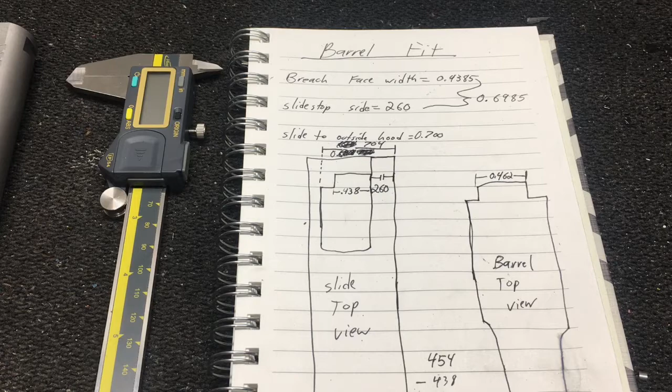Jer-Z Customs here. Just wanted to give you guys a little quick class on fitting a 1911 barrel to the slide. There's a lot of steps to this, but basically, you want to look at these two drawings right here as the top of your slide and the top of your barrel.

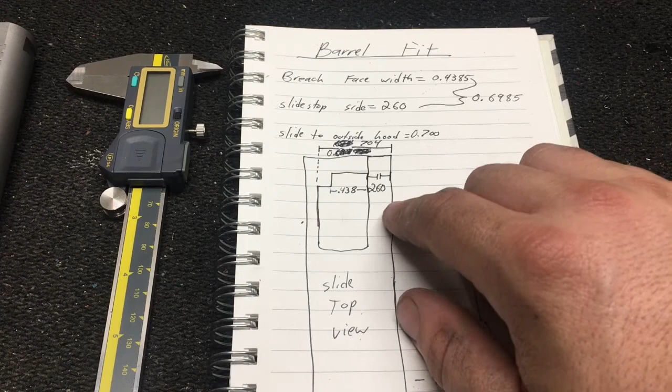Okay, the first thing you're going to do is you're going to measure the wall right here. So if you're looking at the top of your slide with the muzzle facing this way, you're going to measure this wall here on the inside of your chamber to the outside of the slide, the flat edge. Okay, you're going to want to make sure that your caliper is flush on that flat edge. All right. Now remember that these measurements I have written down here are for my weapon, my slide dimensions, my barrel dimensions, everything like that.

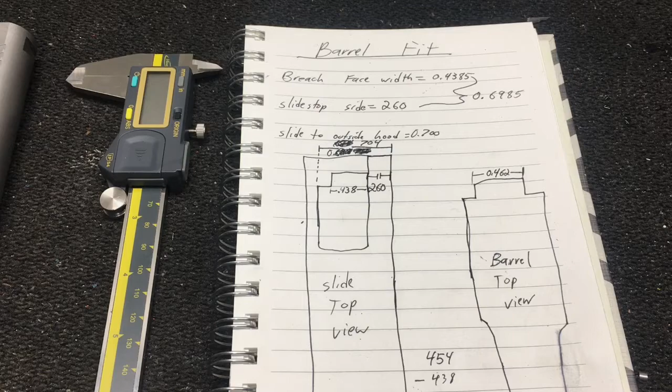Personally, I got a barrel from Bar-Sto. All right, this is a very good barrel company. They make a lot of match barrels. They do a lot of competition stuff with Glock, Beretta, but this company is very, very good and well reputed. All right, so moving on from that, what you want to do is you want to get these measurements.

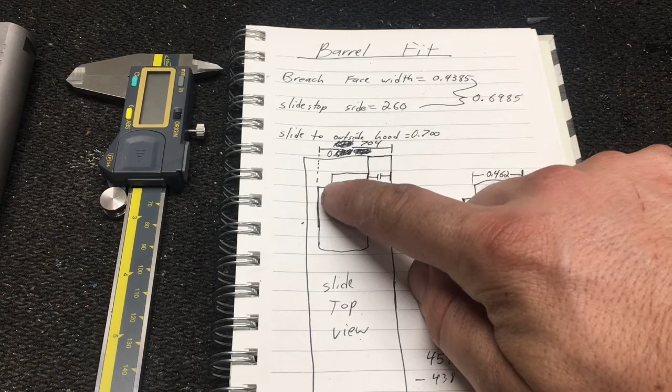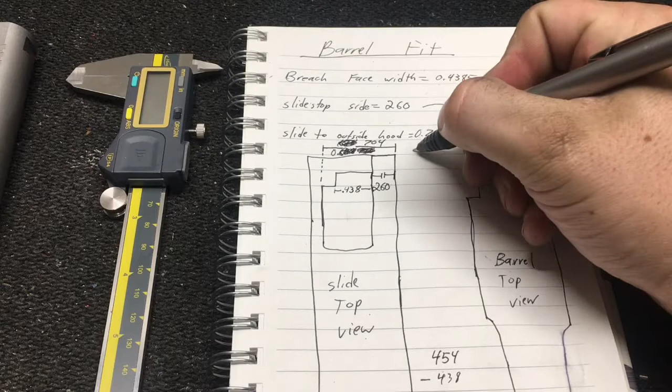Okay, you want to first measure from the inside of your wall here to the outside of your wall, and then you want to measure the width of your breech face from here to here, and then once you get that measurement, you're going to add it together, and you're going to come up with a number. You're going to put that number off to the side. Here, this time, mine was 698. You'll see a cross out right there. I'll go ahead and write it in. So 698.

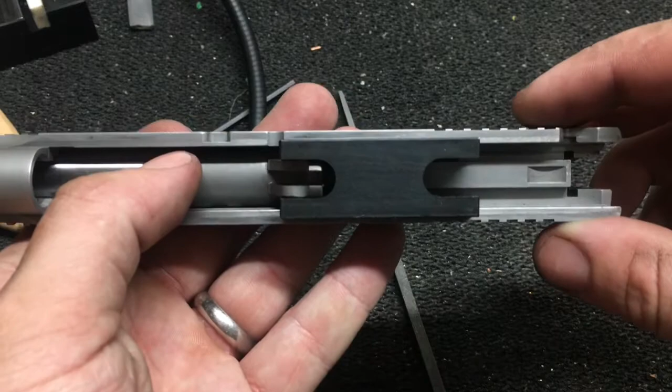Now, then what you're going to do is you're going to put your barrel inside the block. So what I meant by barrel in the block is you're going to slide your barrel through. Now, remember that I'm using a bull barrel here. If you are using a barrel with a bushing, you're going to want to put either your fitted bushing or a loose bushing around your barrel to slide it in, okay? Because that's going to make you have the correct fit.

Then you want to get one of these barrel alignment blocks right here. Brownells sells them. It's a great tool. It keeps your barrel lugs centered and makes sure that your barrel, your breech face, your firing pin hole, and your actual center of your bore is lined up correctly. Okay, so once you have that, you're going to go ahead and turn your barrel over, and you're going to take the measurement from the outside of your barrel, this surface right here, to this flush area right here.

And you want to be careful when you're doing this, because when you're measuring with the caliper, it's very easy for the angle to get skewed. So you want to make sure that when you put the teeth of the caliper on the outside of this, hold it up to a light and make sure that there's no light coming through between the tooth of the caliper and the side of the slide.

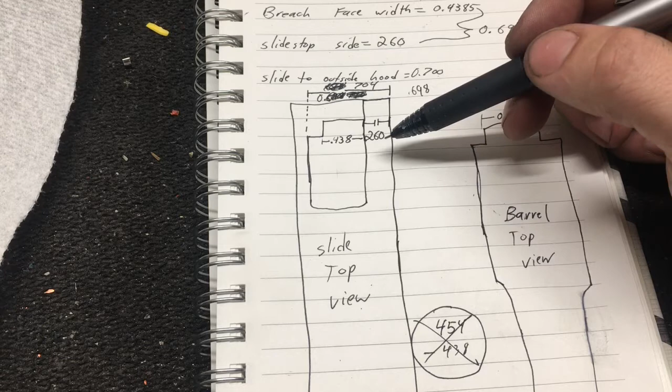Alright guys, so once you have your measurement from the outside of your barrel to the outside of your slide right here, you're going to subtract that from your measurement from the addition over here. Okay, so you guys remember what we did? We did 438 plus 260. So you should have come up with about 698, or at least those are my numbers. So you're going to take that number and subtract it, and that'll tell you how much you need to take off of this side of the barrel hood. Okay, that's this side right here. You're going to take that amount off here.

Then remember, you measured what your true measurement of the actual breech face was, which was 438. So after you take that amount off right there, you're going to take the remainder from 438, and you're going to take that off of the other side of your barrel, okay, right here. So you take off your first subtraction from this side of the barrel, and whatever's left over from the total amount minus this 438 is what you're going to take off of this side.

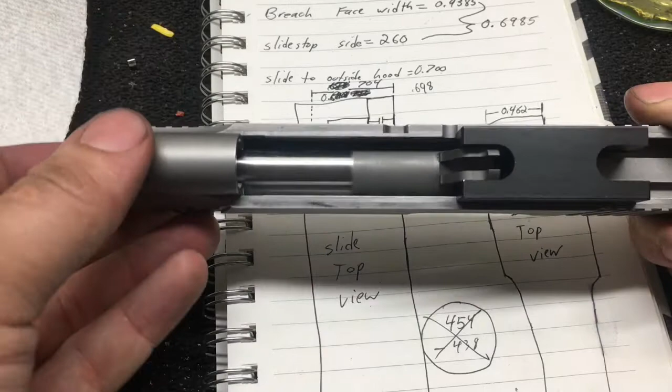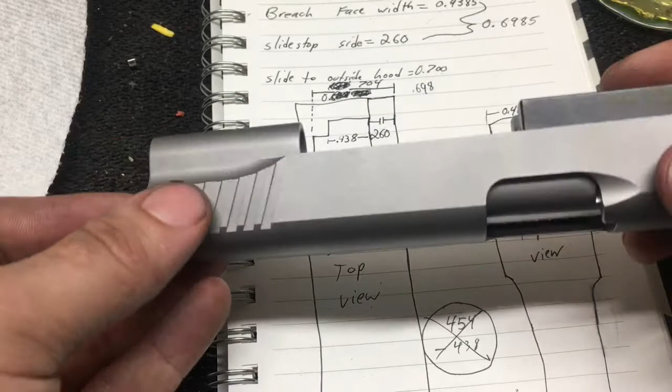Okay, so for the last part of this video, this is part one. There's going to be a part two of the barrel fit. You've got your alignment block done, your filing is all complete, and your barrel is seated in the breech face. Now, you'll notice that there is a pretty good sized gap right here between the back of the chamber and the slide itself, okay? And also you'll notice that the barrel itself is not seating in the lugs, okay?

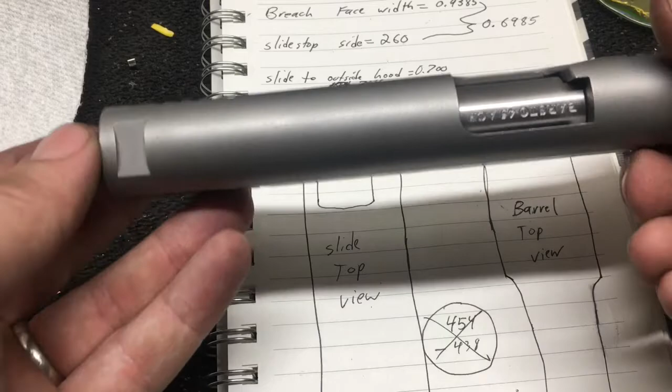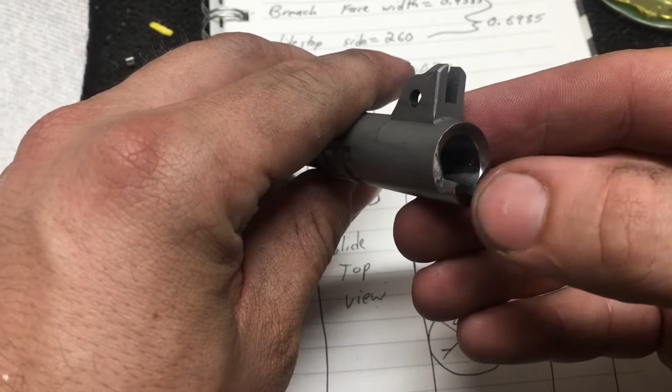So this is when we're going to start taking measurements to file down the face of the barrel, which is going to be this piece right here. We're actually going to start filing down this surface right here. Okay, and what that's going to do is allow our lugs right here. Excuse me, these are technically barrel lugs, but these are also lugs. That filing right there is going to allow these lugs to align with the slide and seat into it.

Okay, and you want that to be not too tight, not too loose. You want it to be just right. So you're going to take off a little bit at a time. You'll notice that I've marked this with some Sharpie right here, and that's to show the rubbing on the breech face to make sure that my filing is flat and there's not any angles going on there.